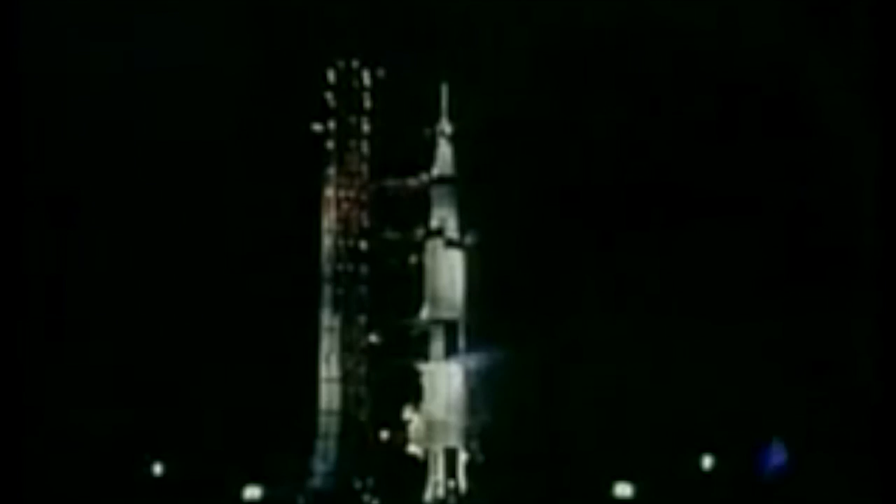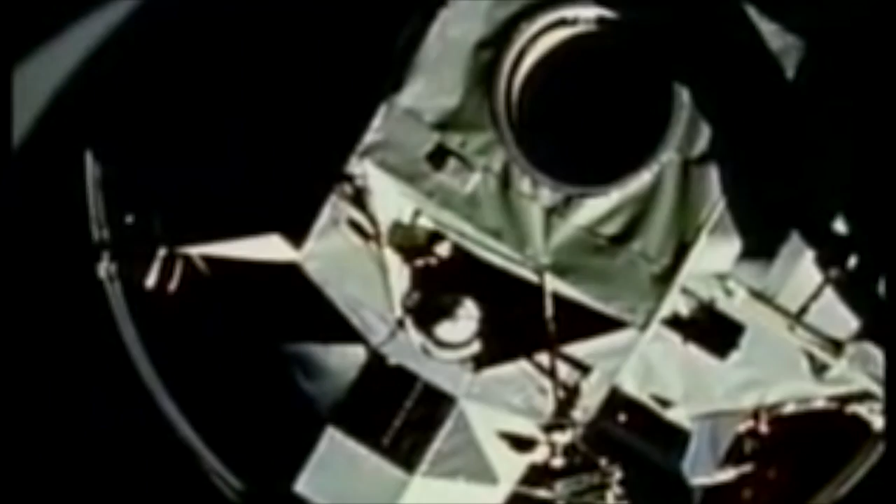Have you ever wondered how the astronauts managed to get to the moon? In 1961, President John F. Kennedy set out a mandate for the United States. This nation should commit itself to landing a man on the moon and returning safely back to Earth. At that time, there were more questions than answers.

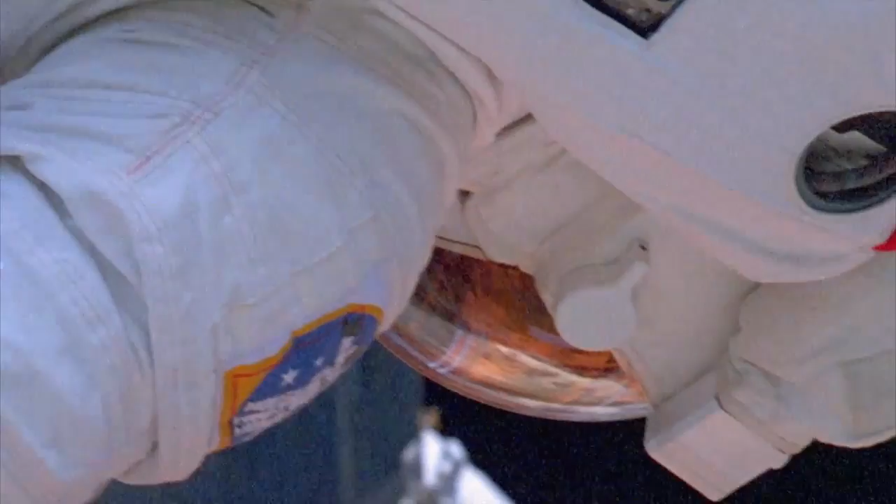What energy supply could be used to propel a spaceship such vast distances while safely powering the onboard electronics once in orbit? What could keep the astronauts warm as their ship traveled through the sub-zero temperatures of space? How could the astronauts carry enough drinking water on board for such a long voyage? NASA engineers wrestled with these problems and others.

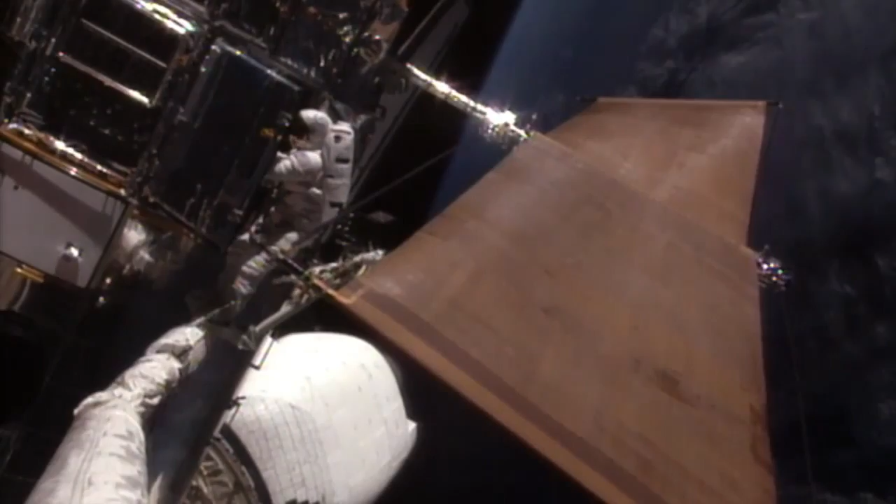Nuclear power was too dangerous to use, batteries were far too heavy, and solar panels were not yet a robust enough technology. The answer was found in a technology that was first invented in 1839 by Sir William Grove, and first successfully produced in 1932 by Francis Bacon, the hydrogen fuel cell. Hydrogen fuel cells became the obvious choice for space missions.

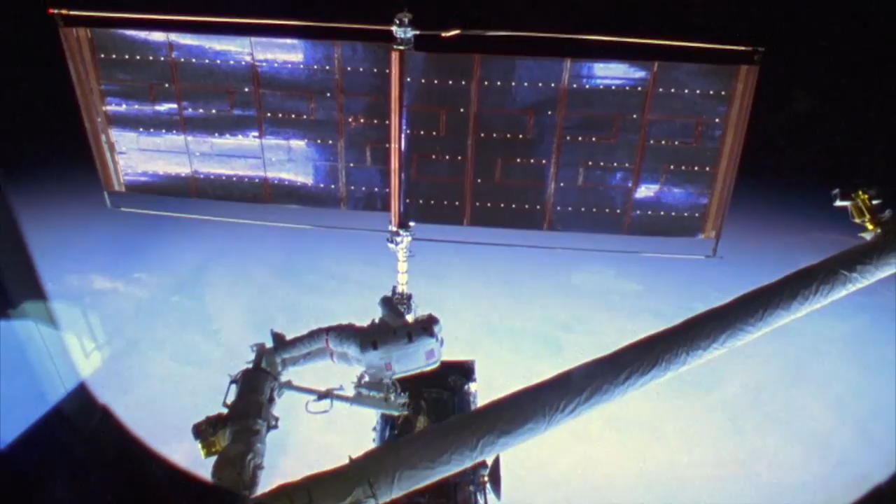They run on a clean fuel to produce the electricity for the ship's energy needs with two important byproducts, heat and water. The heat and water produced by the fuel cell kept the astronauts warm and hydrated as they traveled to the moon and back. It could even be used as rocket fuel to get the space shuttle into space.

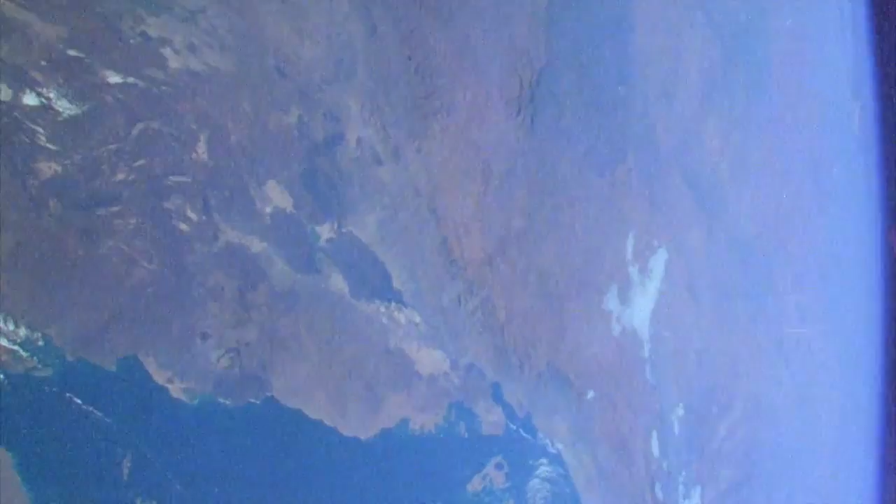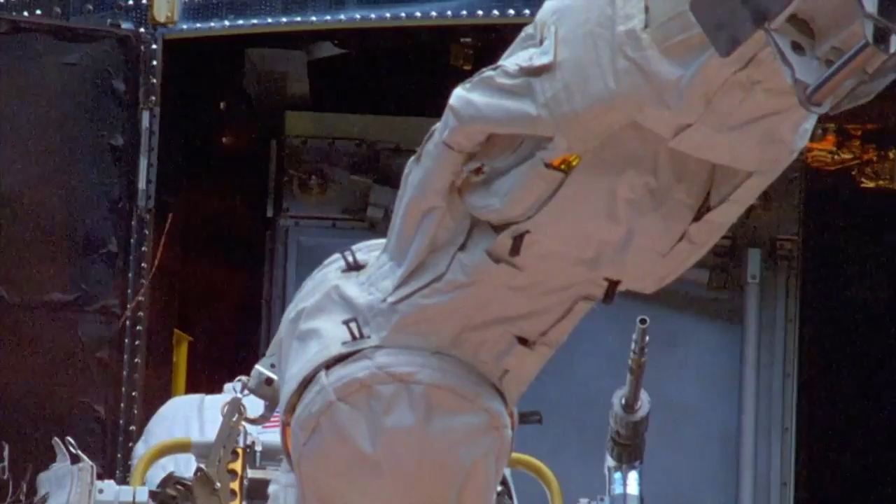It was in the beginning of the 1960s that aircraft engine manufacturer Pratt & Whitney licensed Bacon's patents for the alkaline fuel cell. NASA then decided to use the AFC fuel cell to power their spacecraft. These fuel cells, however, require very pure hydrogen and expensive platinum catalysts to ensure clean operation and long life. Because the fuel was so pure, the fuel cell's waste was clean enough for the astronauts to drink.

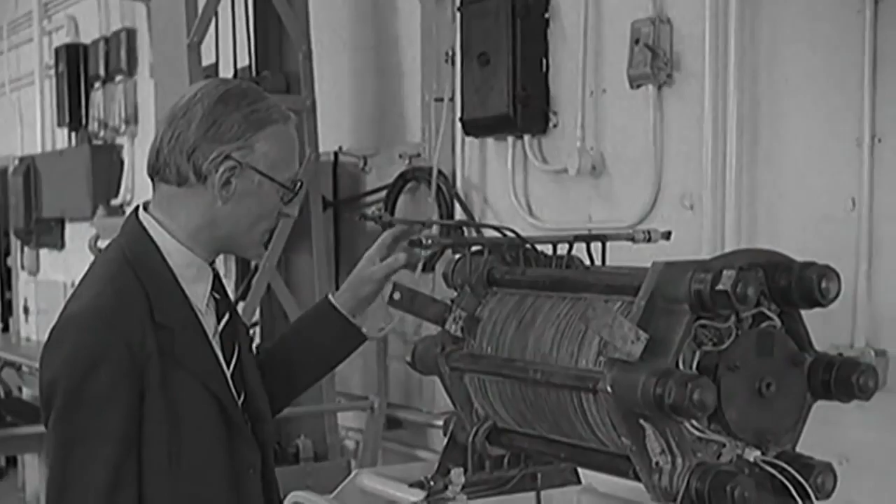The alkaline fuel cell was for a long time considered a mere scientific curiosity. Francis Thomas Bacon was a forerunner in fuel cell technology. Bacon was fascinated by the ability of fuel cells to directly convert chemical into electrical energy, and he became convinced of their usefulness. During the 1950s, the Bacon cell emerged as the leading fuel cell technology, with a 5-kilowatt version demonstrated in 1959.

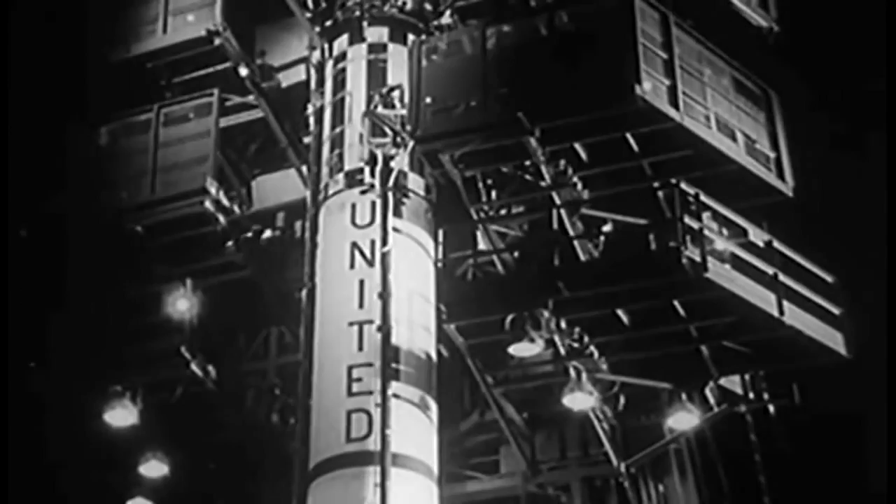Pratt & Whitney subsequently licensed the design to power the Apollo space vehicle, an improved version of which supplied electricity for the space shuttle. The Bacon cell failed to find a niche outside of space application, owing to its requirement for pure hydrogen and oxygen. Its success in that role served as a technical beacon of the period and inspired research on many other fuel cell operating systems.

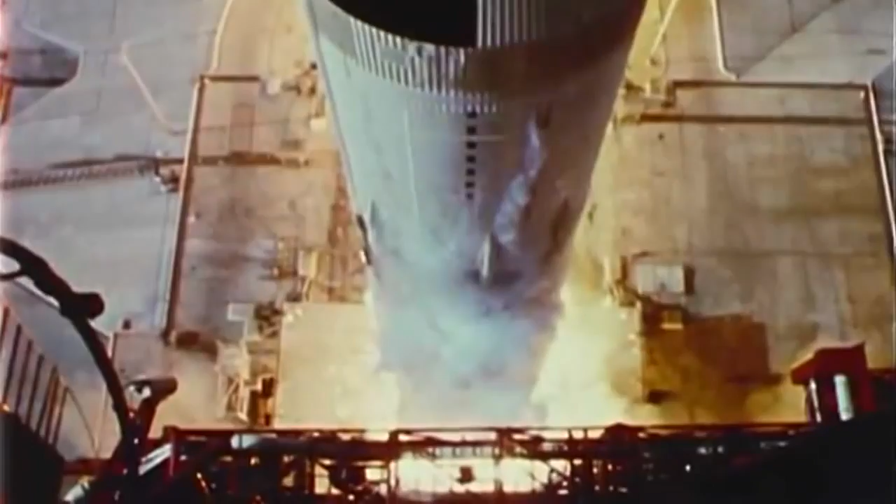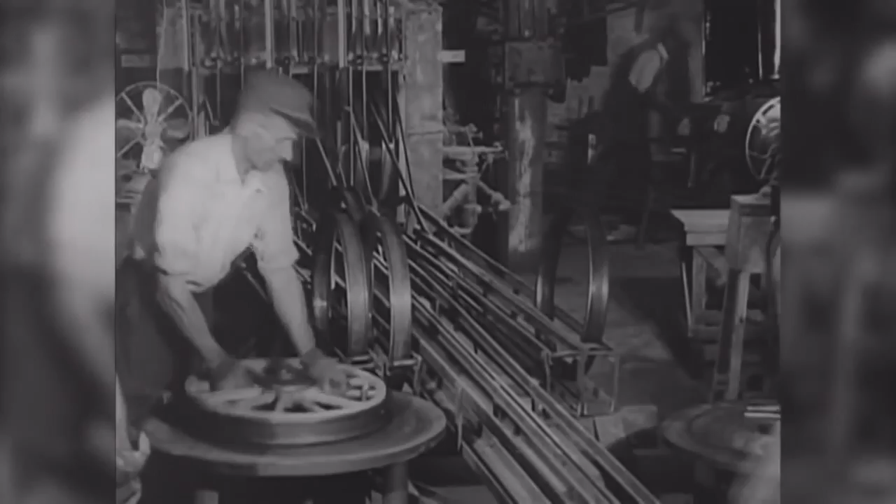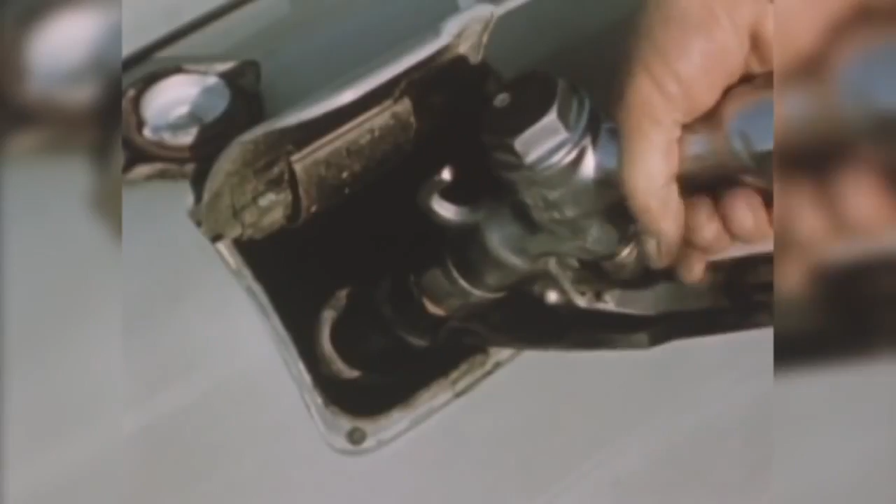During the 1970s and 80s, the cost of catalysts and limited materials availability restricted the alkaline technology development. Moreover, the companies recognized that alkaline fuel cells' intolerance of carbon dioxide, one of the major disadvantages of alkaline fuel cells, and the difficulties and high costs of overcoming the problem were an insurmountable barrier for commercialization in terrestrial applications. Other chemistries appeared to offer alternative routes to power at a more acceptable cost.

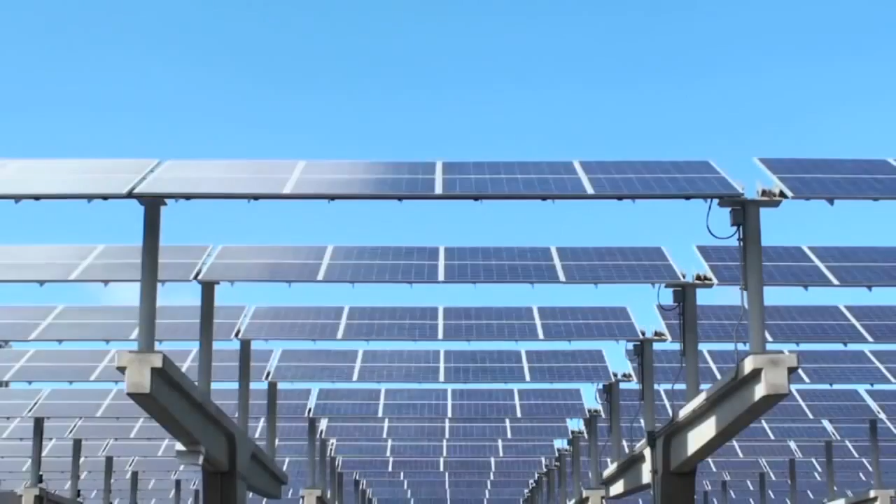However, it also became apparent that specific chemistries suited certain applications. There was no single best technology. With 23% less CO2 emissions than a diesel generator, ammonia-fed alkaline fuel cells are beginning to replace diesel generators. Alkaline fuel cells have proven to have 14% higher electricity generation than a diesel generator.

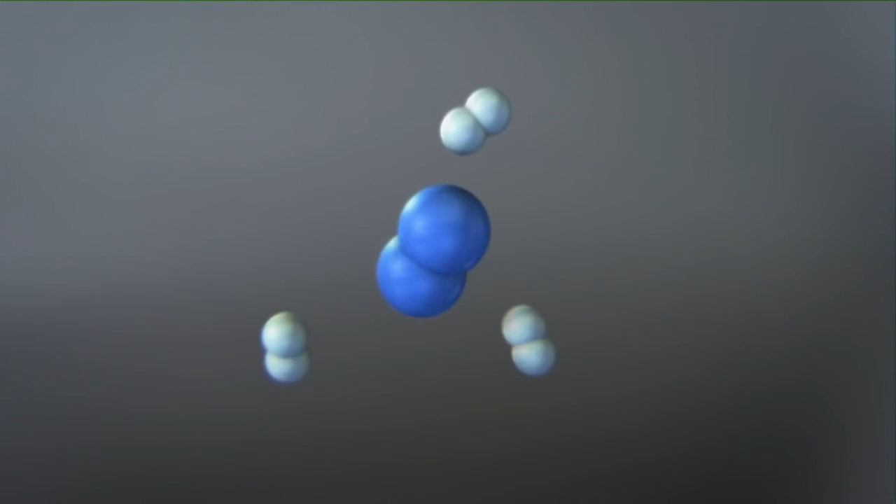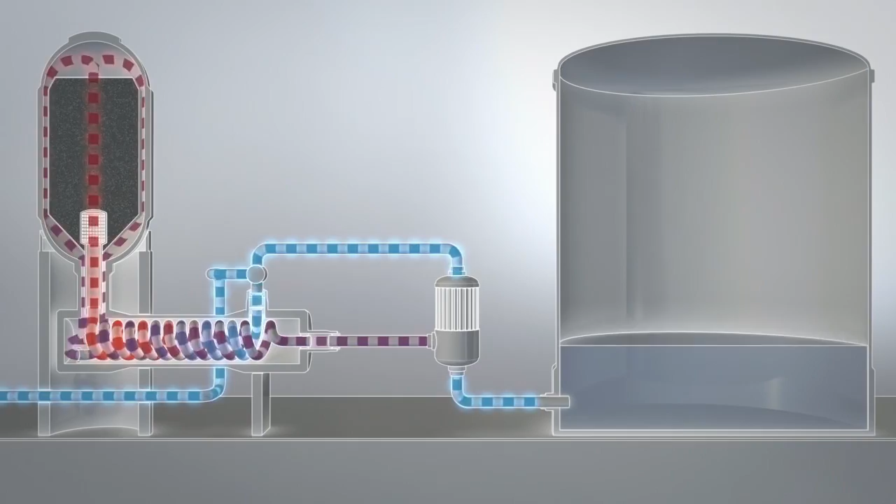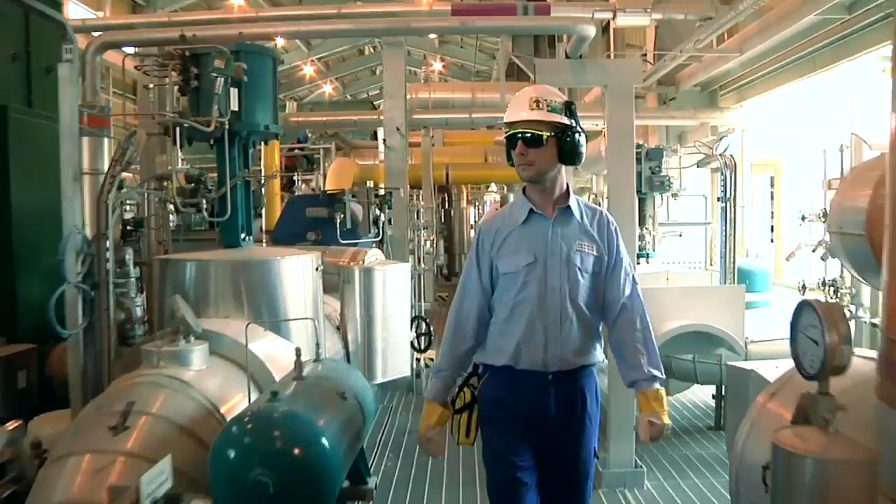The worldwide production of ammonia amounts to 100 million tons per year and is one of the most used chemicals produced from natural gas. The use of small amounts of ammonia as a gasoline additive is proposed to make combustion engine exhaust gas absolutely NOx-free. Alkaline fuel cells are not very sensitive to ammonia in the fuel, since the electrolyte rejects ammonia, and the residual ammonia and the hydrogen can be recirculated through the dissociator catalytic heating unit. The whole system, ammonia dissociator plus alkaline fuel cell, is characterized by a simple design and high efficiency.

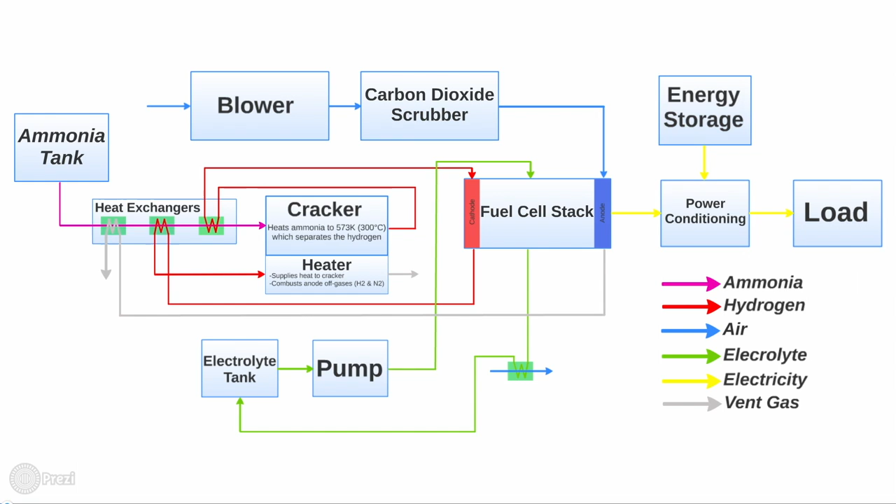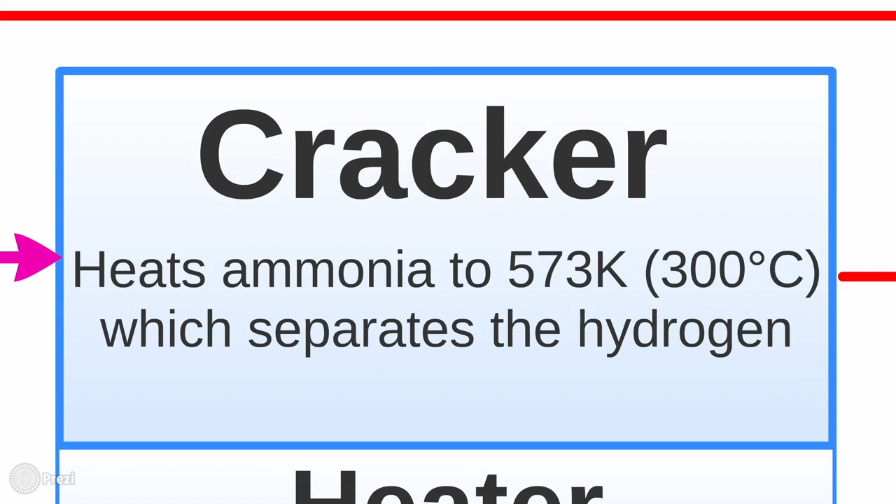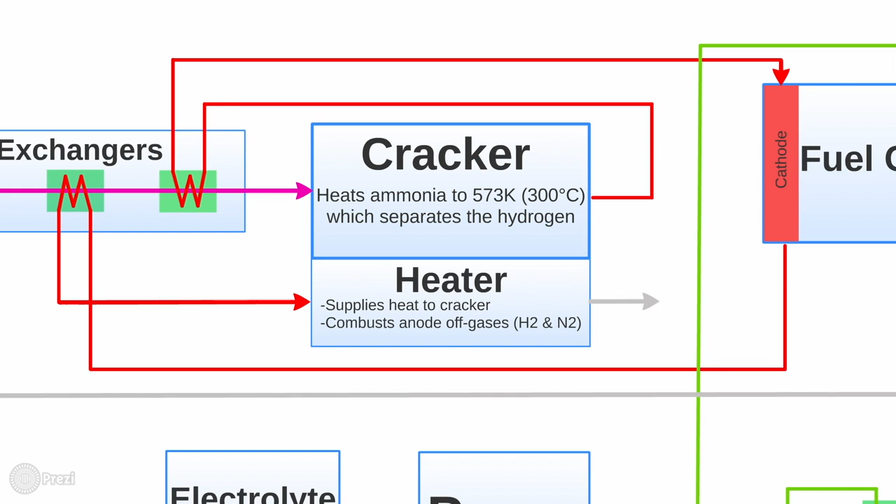Here you can see the diagram of an ammonia-fueled alkaline fuel cell. From the ammonia tank, it is sent through 3 preheating chambers before it reaches the cracker, where it is then heated up to 300 degrees Celsius, thus separating the nitrogen gas from the hydrogen gas. The hydrogen is then sent back through the 3rd preheating chamber before it reaches the cathode of the fuel cell. From there, it's sent through the 2nd preheating chamber before it reaches the heater. Here it is combusted to heat up the cracker and then vented off into the atmosphere.

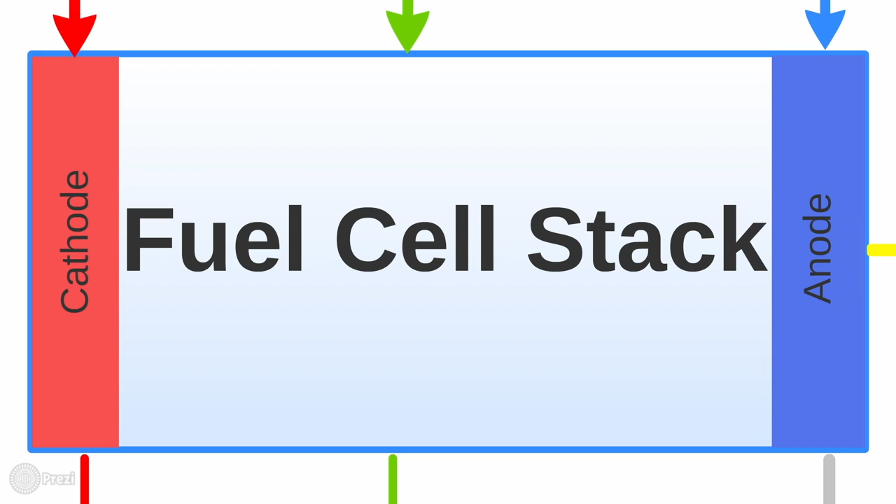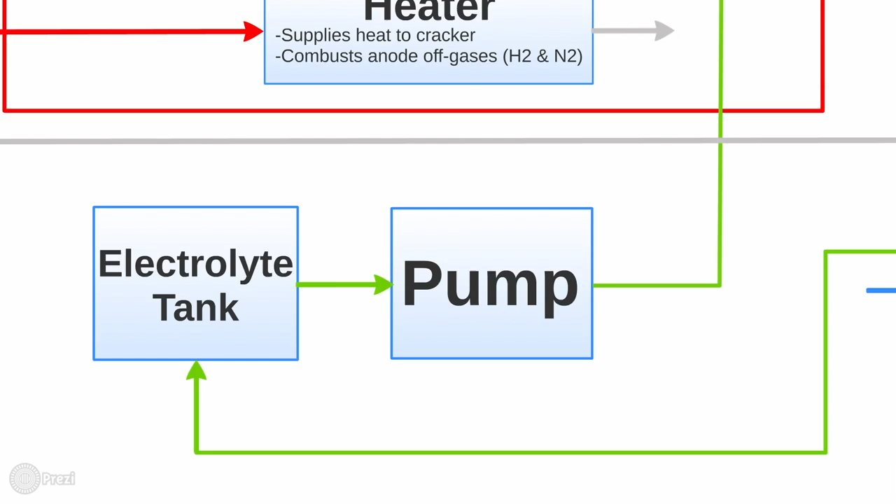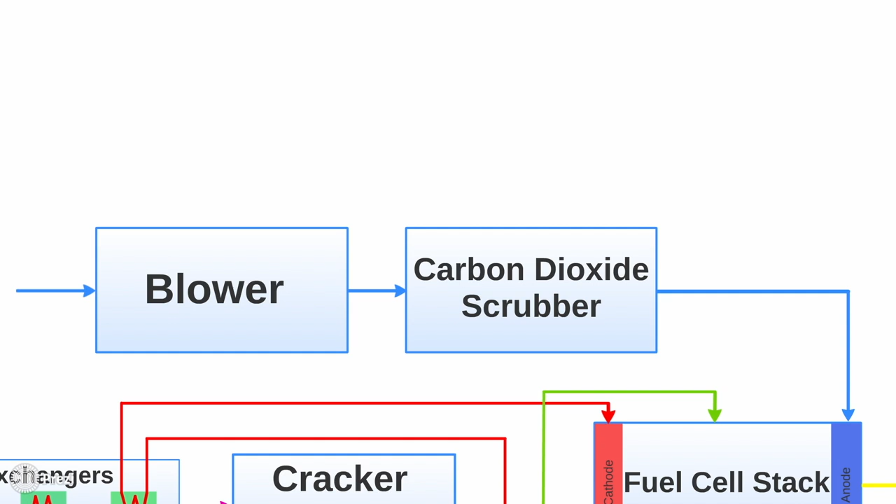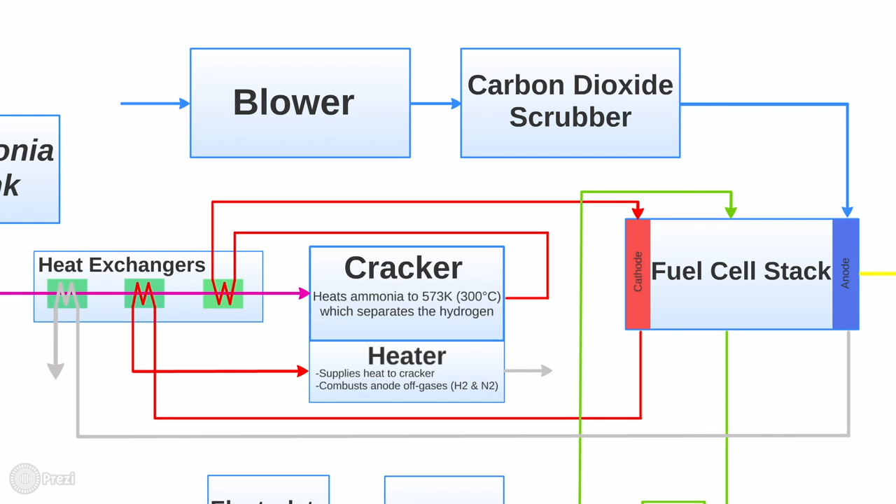The electrolyte of the fuel cell is a mobile electrolyte which flows through a heat exchanger cooled by air before it reaches the electrolyte storage tank. It is then pumped back through the fuel cell as it is a mobile potassium hydroxide electrolyte. On the anode side, air is brought in through a blower and scrubbed through a carbon dioxide scrubber in order to remove any harmful carbon dioxide, before it reaches again the anode of the fuel cell stack. From here, it is vented off through the first preheating chamber before it reaches the atmosphere. Current is then drawn from the fuel cell in addition to any external energy storage in order to power whatever load the fuel cell is hooked up to.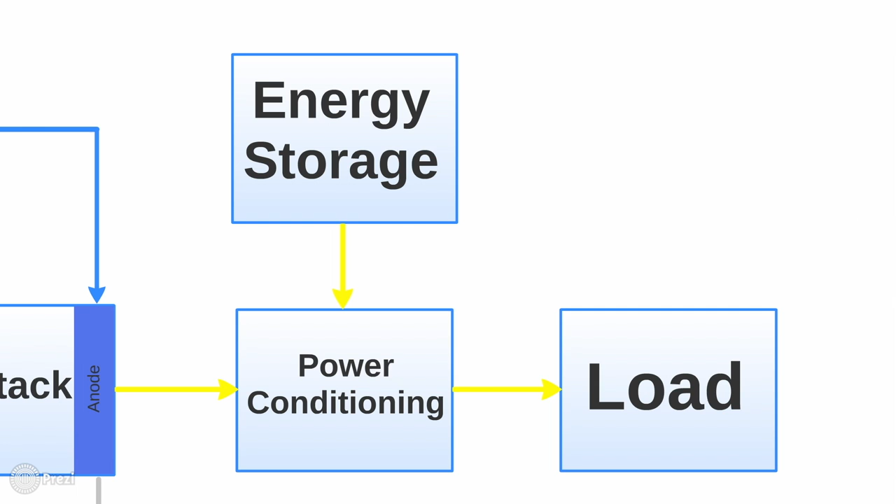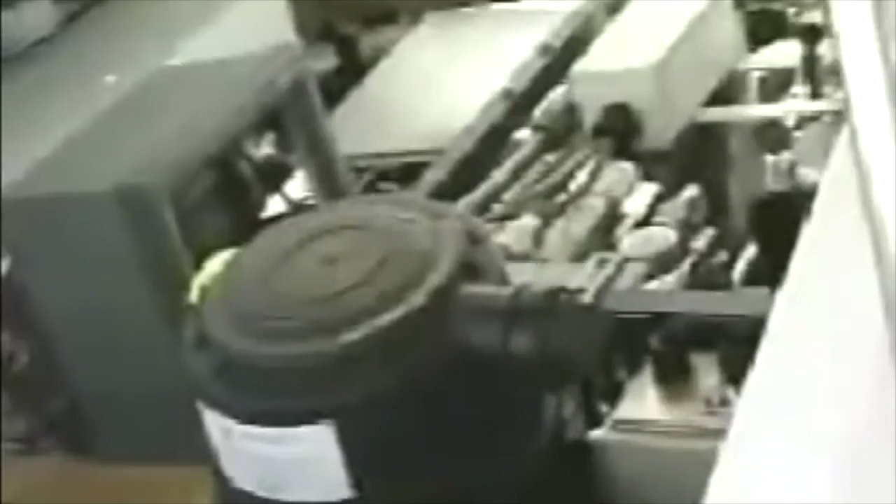Alkaline fuel cells can currently be used as the primary power source of boats and golf carts. The alkaline fuel cell powered boat is quieter and much more efficient than the typical gasoline-powered engine. The AFC boat does not release carbon dioxide. The only byproduct is water vapor. Since the fuel cell only rejects water, this makes it favorable when comparing it to a gasoline engine.

Mike Strizki collaborated with Duffy Boats and other partners to develop the first zero-emission, hydrogen-fueled public water taxi. The boat is powered by a fuel cell engine from Anuvu Incorporated and was demonstrated for attendees at the World Maritime Technology Exposition. The partially government-funded boat illustrates the real-life feasibility of environmentally conscious marine transportation initiatives and the specialized features that Anuvu's fuel cells provide for the maritime transportation industry.

The water taxi runs on an Anuvu PowerX fuel cell battery electric hybrid engine. The result of nearly 10 years of research and development, Anuvu's PowerX fuel cells are cleaner and quieter than current marine vehicle engines. Emitting only heat and water vapor, Anuvu's fuel cells allow government ferries, commercial marine fleets, and recreational boats to have an environmentally friendly engine.

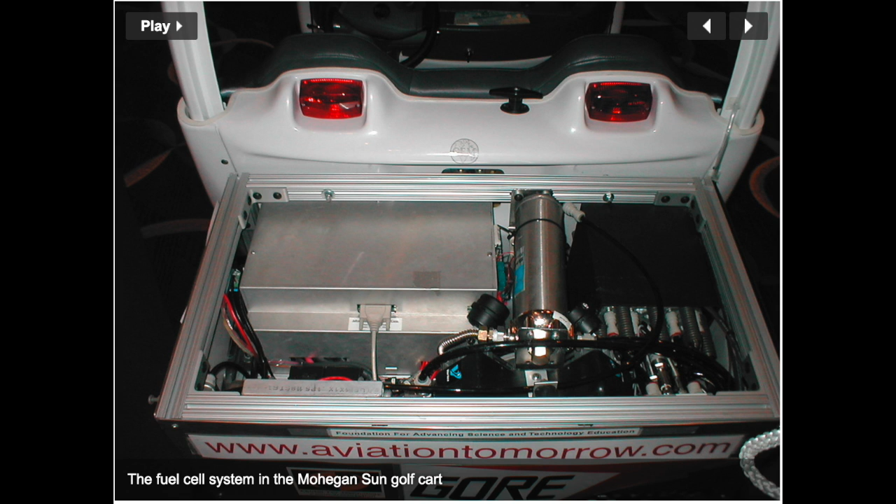Mike Strizki, with Renewable Energy International, developed a hydrogen fuel cell powered golf cart to serve as a neighborhood vehicle for the Mohegan Nation's New Energy, Environment, Economics, and Education Center. This modified GEM vehicle manufactured by Daimler Chrysler runs on compressed hydrogen, creating no emissions.